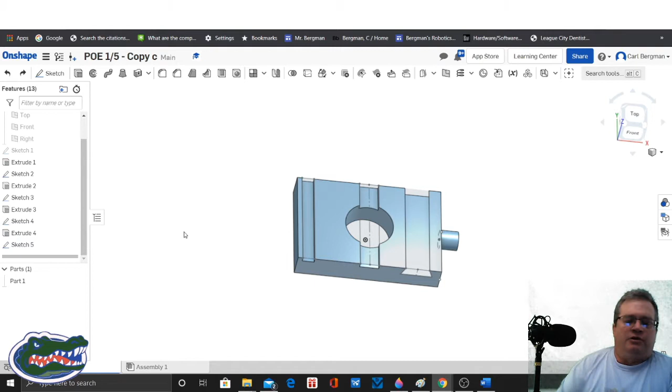Okay, so here's our library. Go ahead and select your piece, bring it up, and we are going to get into our tutorial. We're going to go through a few features and show you how to go back in time and adjust things that were off by a little bit, make some minor adjustments, and then reprint this thing on your 3D printer.

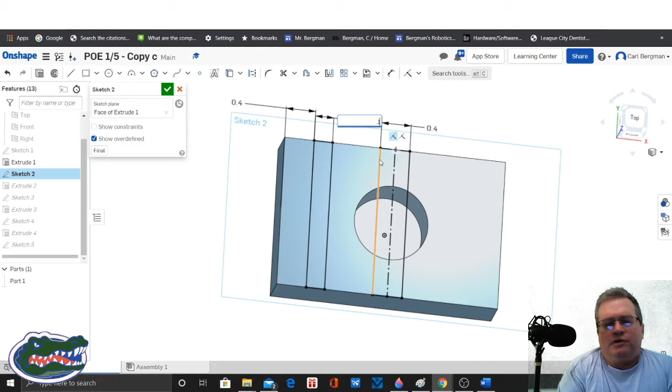So we're going to go to Sketch 2. We're going to jump all the way back to the sketch, and we're going to adjust the distance that cutout is from the end there by 0.4 inches from the end, and then 0.1 inches wide. And then we're going to click the check mark, and it's going to recut that.

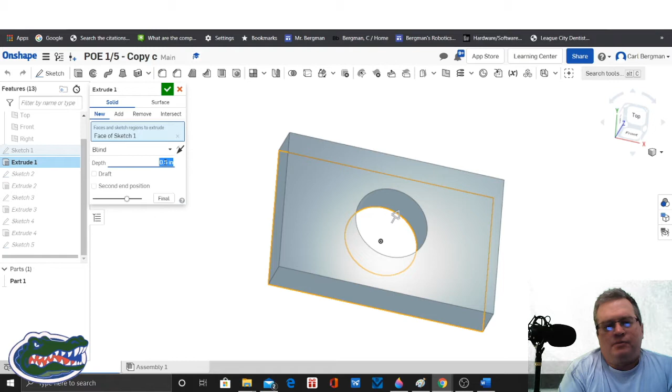Then we are going to go into the extrusion—not that one. It's the middle extrusion. We got to go back to extrusion 2. There it is.

All right, so we're going to click on that on the depth, and we're going to go a little bit deeper. Let's just say that the piece that you printed in the printer was off, and so you want to adjust the depth to make it a better fit.

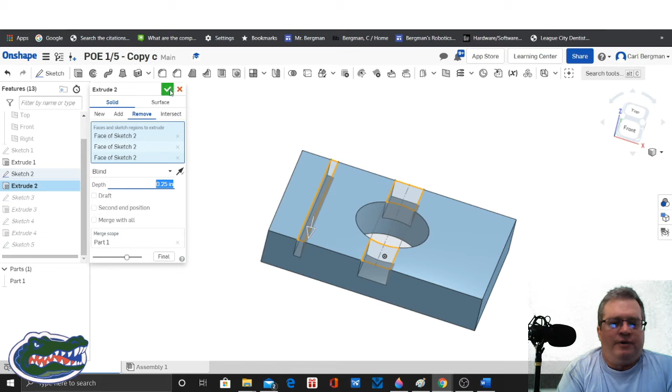So we're jumping in there, and we're going to cut into this piece just a little bit more. You can use the wheel on the mouse, or you can actually type in the value. And since our default setting is in inches, you don't actually have to type in inches. It does it for you.

All right, so if you want to have different depths, you're going to have to recreate those individually and have separate extrusions.

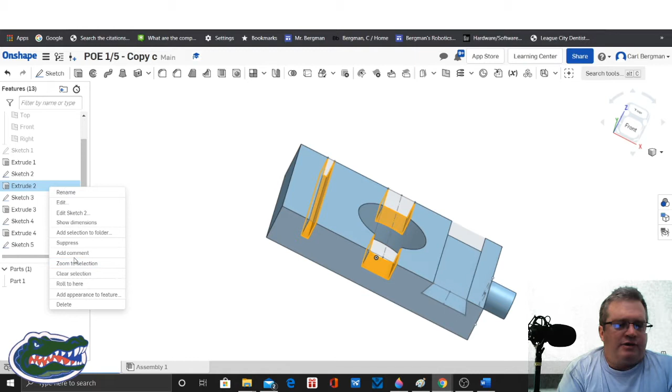All right, so we're going to go to extrusion 2, and we're going to suppress that. When you suppress an extrusion, it just makes it disappear. It didn't delete it, but it's not going to print unless you unsuppress it.

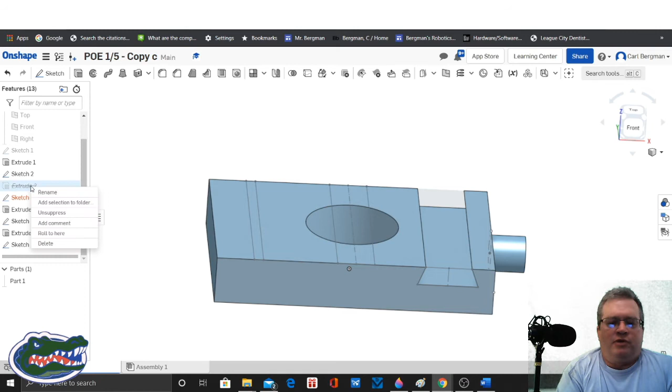And so this is just if you want to redraw, start from scratch, but you want to be able to save that step in case you want to bring it back. So I unsuppress it, brings it back. That's a pretty neat feature. So if you want to compare and contrast before and after, you can use that suppression feature.

All right, so now we're going to just hover across the menu buttons across the top. 1 or 2 seconds hovering brings up a description of what that thing does. And one of the main things that I use a lot is the fillet.

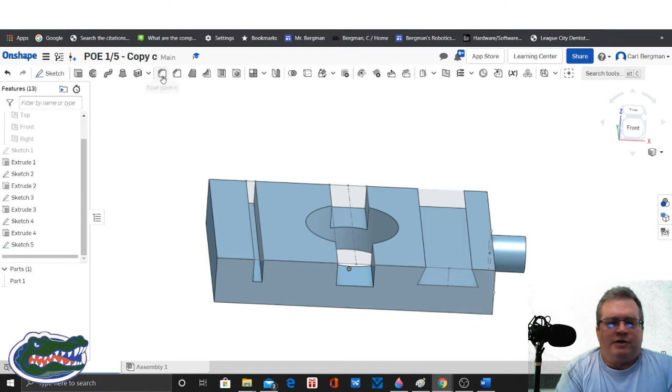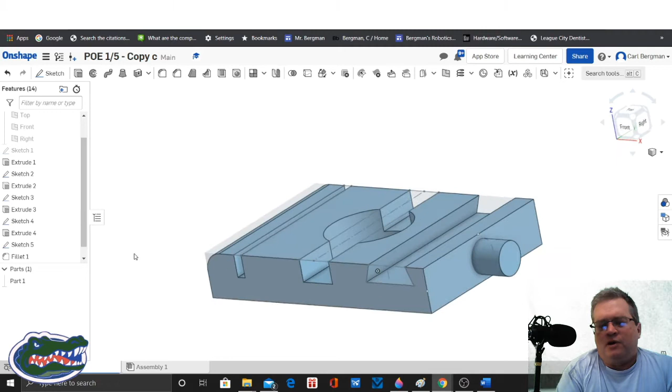What the fillet does is you click on an edge or edges, and you use the fillet to round off that edge. What that does is, in a sense, it makes that edge stronger. That arch that you've created distributes weight a lot more efficiently than a straight 90-degree angle edge. So if you really want to create a durable 3D print, a good way to do that is to fillet your edges.

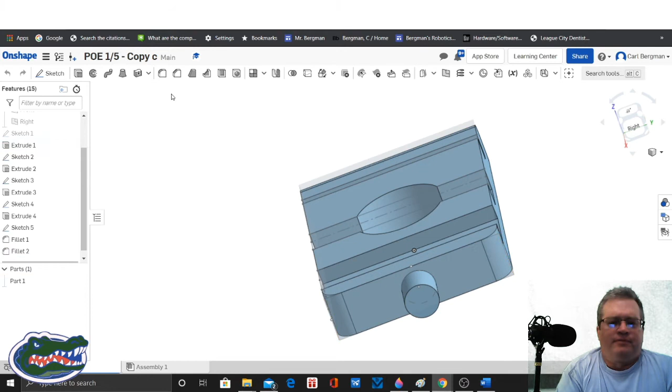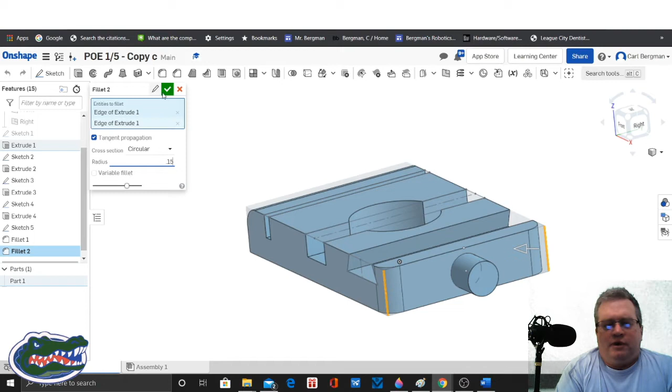It looks like I filleted just a little bit too much. So you want to make sure when you do fillet you don't cut into your dovetail there or any other object that you have. So cut that down from 0.2 to 0.1, 0.15, and that's in inches. That avoids cutting into your dovetail. That wouldn't have done much—whatever fits in that dovetail still would have gone in there, but that looks a lot better.

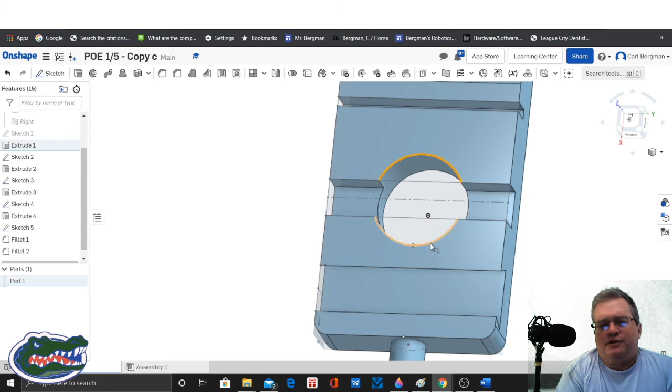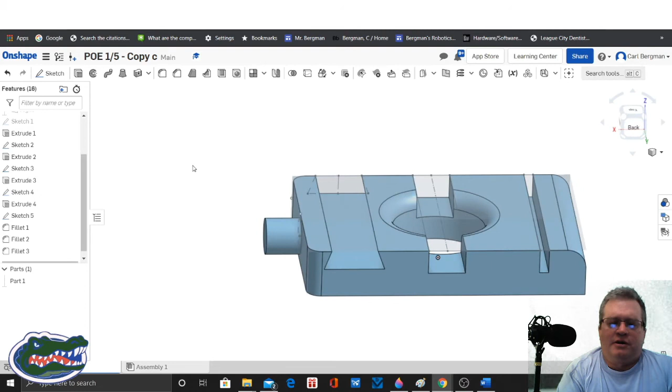All right, so another area—the center of this piece is obviously going to be the weakest part of it. So you want to strengthen up just a little bit with the filleting. It doesn't have to be too drastic; 0.15 is good enough. And since we slimmed up that first notch, that's another weak point, because whatever fits into that first notch is going to probably hit the face of that. So to avoid damage, you can fillet those as well, with just a very slight fade. Sometimes you have to reselect it.

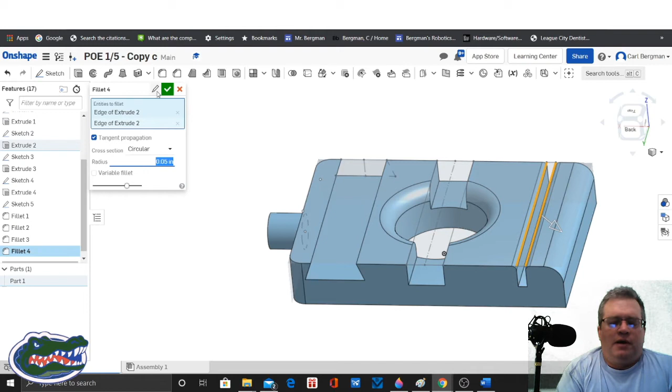Too much. That's good. So, yeah, I use that feature a lot.

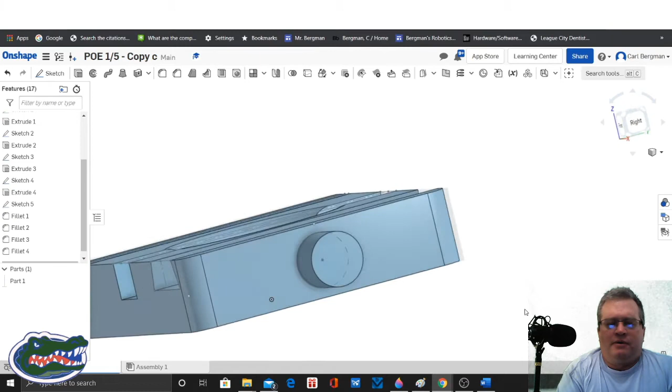If you're going to win a design award in any robotics competition, this is the way to do it. Make your pieces look professional, durable, and that's how you do it.

All right, so we've gone through quite a bit of the features. Let's see if there's anything else I want to discuss. Let's see here.

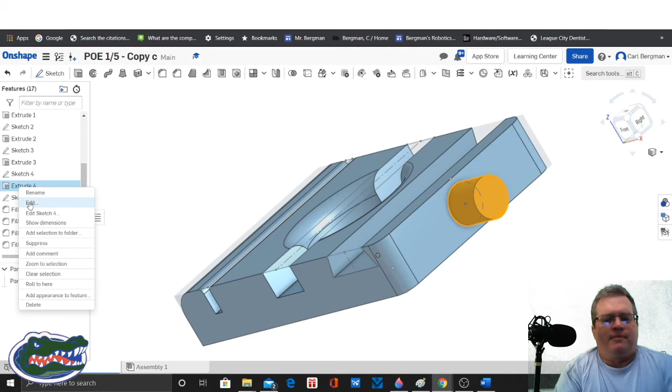So we can also adjust that extrusion. When we first made this, we made it 0.375 on the length and diameter. And I did that on purpose because I knew that I'd have to come back and readjust it.

So if you want to use the arrow, you can. That's a less scientific way of doing it.

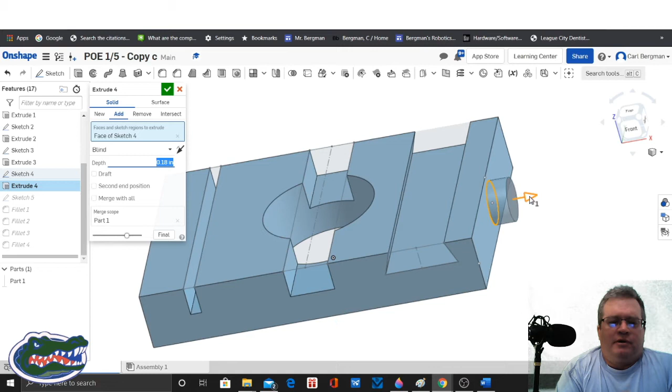But if you know your exact dimensions, and you probably can by measuring the other piece that you're going to fit this up against, you can type that number in.

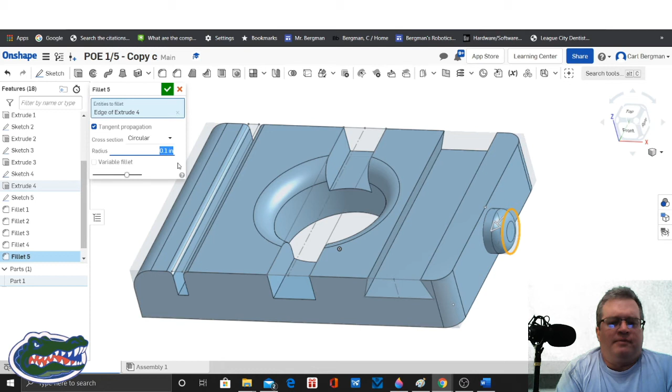And if this is going to be attached and detached on a continual basis, you want to make sure that you make it stronger with the fillet. And it doesn't have to be that dramatic. There you go. That's a nice 3D print.

So if you use a liquid resin printer, that could take 2 hours. With the MakerBot printer,

less than an hour. But the resin 3D printer is a lot more professional. Hopefully we can get one of those for the school.

Anyway, so I'm going to mention this over and over again. Make sure when you create a piece that you make a backup.

So if you want to start over again, but you don't want to completely start over, have some copies along the way as you go.

It's just a good way to, also, if you want to send one of those to your friend that can't quite get past step 3 or step 4, you've already made it to step 4.

It's a good way to send your friend a copy and say, hey, I got you to step 3, here you go, and go on to 4 and 5. It's a good way to help your buddy out.